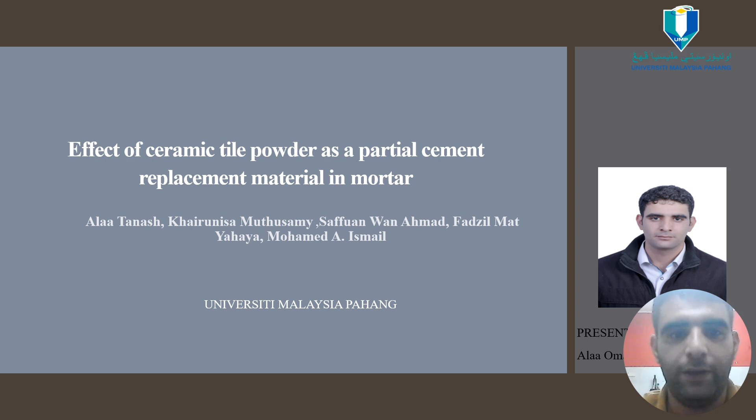I am here today to present my research work under the title Effect of Ceramic Tile Powder as a Partial Cement Replacement Material in the Mortar. We start with the presentation outline. In the beginning, we start with the introduction. After that, the problem statement, objectives of our study, result and discussion, and then conclusion of our study. At the end, the references.

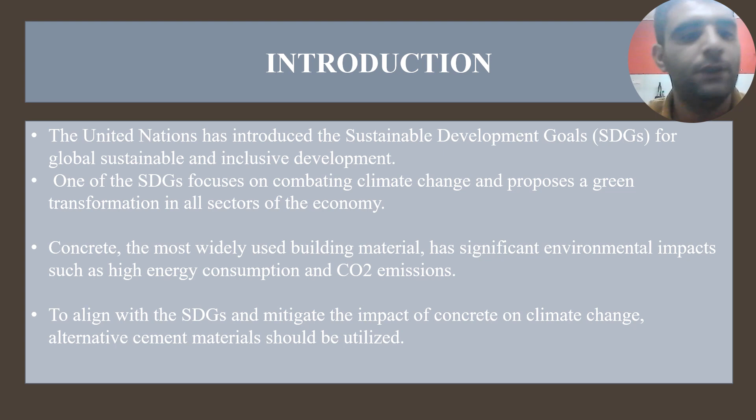Let's start with the introduction. The United Nations has introduced the Sustainable Development Goals for global sustainable and inclusive development. One of the Sustainable Development Goals focuses on combating climate change and proposes green transformation in all sectors of the economy. Concrete, the most widely used building material, has significant environmental impacts such as high energy consumption and carbon dioxide emission. In the end, to align with the Sustainable Development Goals and mitigate the impact of concrete on climate change, alternative cement material should be utilized.

On the other hand, ceramic products such as tile and sanitary ware are crucial components in construction. The global production of ceramic tile exceeded 12.6 billion square meters in 2019. Approximately 30% of ceramic production worldwide is disposed of in landfill annually. Ceramic waste, also from the construction sector, consists of about 45% of construction and demolition waste.

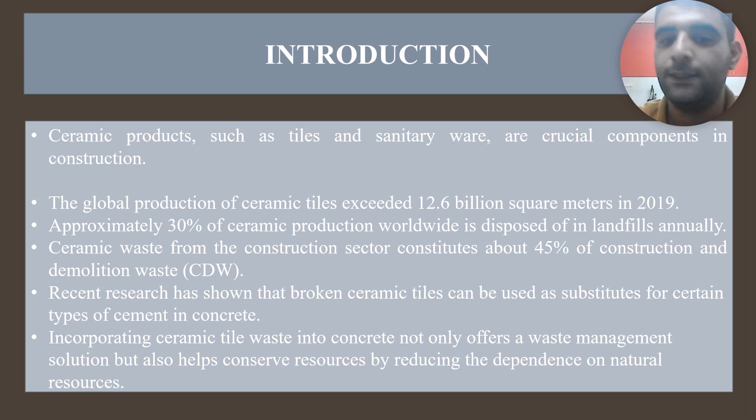Recent research has shown that broken ceramic tiles can be used as a substitute for certain types of cement in concrete. Incorporating ceramic tile waste into concrete not only offers a waste management solution, but also helps conserve resources by reducing the dependency on natural resources.

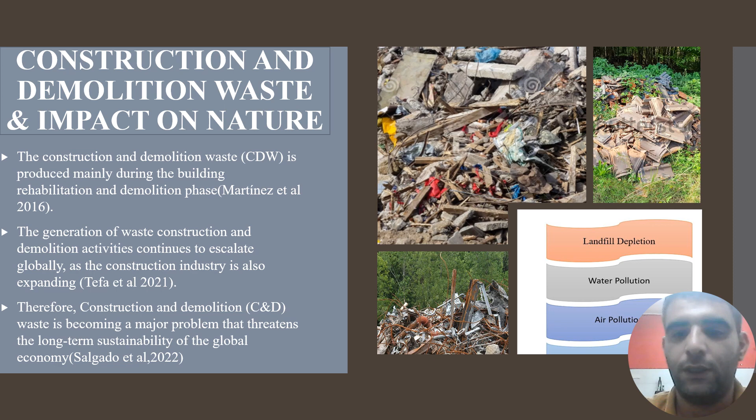Now the problem statement. First problem we have: construction and demolition waste and its impact to nature. The construction and demolition waste is produced mainly during the building rehabilitation and demolition phase. The generation of construction and demolition waste continues to escalate globally as the construction industry is also expanding. Therefore, construction and demolition waste is becoming a major problem threatening the long-term sustainability of the global economy. Here in the pictures, we see some of the environmental impacts of construction demolition waste. First of all, landfill, water pollution, and air pollution.

The second problem statement for our study: cement production and its impact to nature. The cement industry contributes mainly to carbon dioxide emission, and is considered the third emitter sector in the world. After that, energy consumption. The production of cement consumes a lot of energy; it's an energy-intensive process. This also pollutes the environment and, on the other hand, consumes non-renewable resources. Also, air pollution and land degradation.

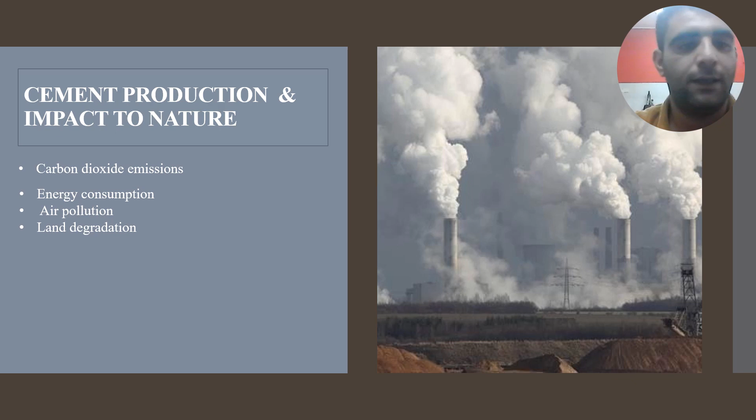Now, objectives of the study. First, determine the effects of ceramic tile powder as a partial cement replacement on the workability of mortar. The second objective, to determine the effects of ceramic tile powder as a partial cement replacement on the compressive strength of the mortar. At the end, the third objective, to determine the effect of ceramic tile powder as a cement replacement on water absorption of the mortar.

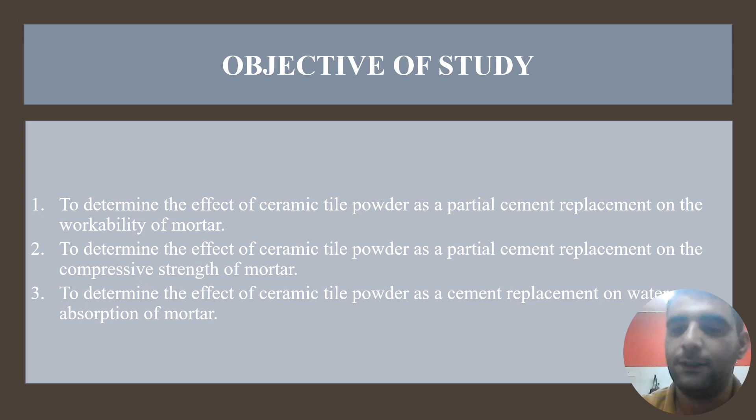Now, experimental program. Here we show the mixing ingredients. First of all, cement. We use ordinary Portland cement for our research. Second, the sand. River sand has been used as a fine aggregate. Ceramic tile powder, as a partial cement replacement with 10, 20, 30, 40 up to 50% replacement of cement. At the end, the water: clean tap water was used in this study.

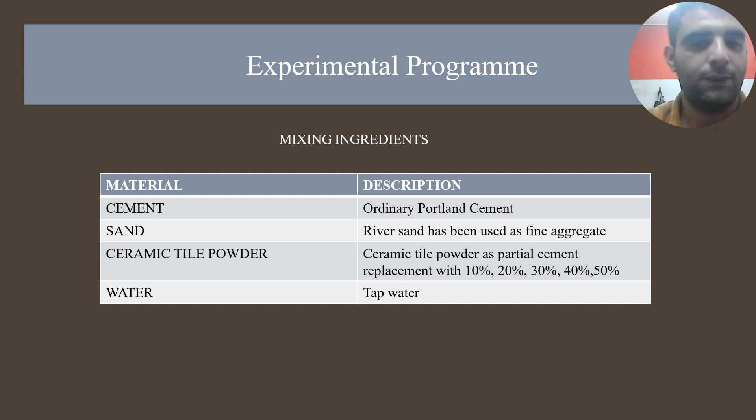Okay, testing and code practices. The first test, the flow table test. A flow table test was used to determine the mortar workability. The workability of mortar was determined using a flow table test in accordance with ASTM C1437-15.

The second test is the compressive strength test, to obtain the compressive strength and maximum loading of the mortar with various percentages of ceramic tile powder. The test was carried out in accordance with ASTM C109.

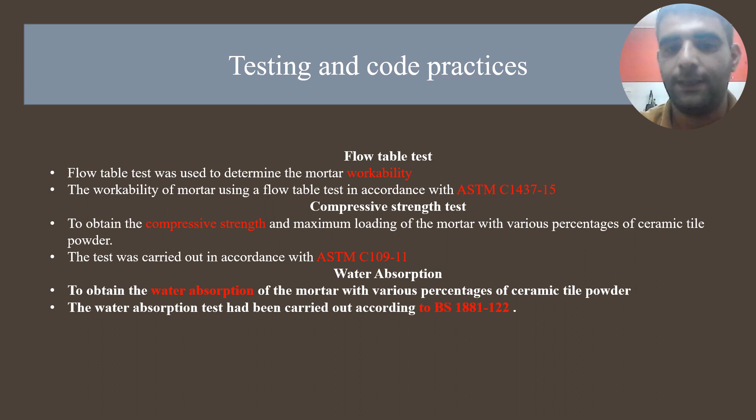The third and last test, water absorption, to obtain the water absorption of mortar with various percentages of ceramic tile powder. The water absorption test was carried out according to BS 1881-122. Now the results and discussion.

First of all, the workability. Here in the figure, we can see the flow behavior of mortar. Based on the figure, the flow of mortar decreases with increasing proportion of CTP as a partial cement replacement, reaching 150 millimeters at 50% replacement.

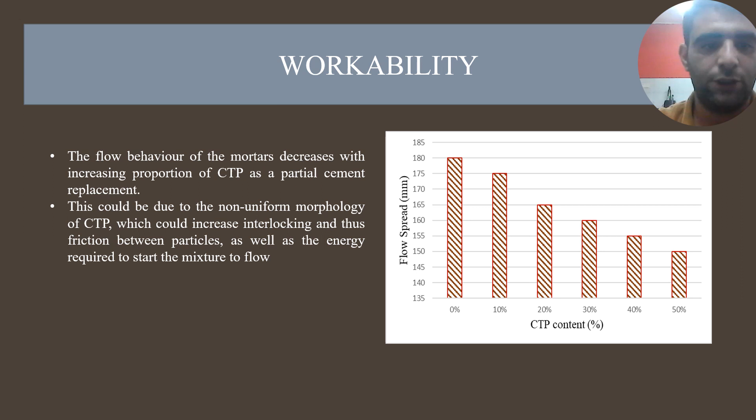This behavior could be due to the non-uniform morphology of CTP, which could increase interlocking and thus friction between particles, as well as the energy required for the mixture to flow.

The second test we have here is the compressive strength test. We can see in the figure the compressive strength with various percentages of ceramic tile powder content. The compressive strength decreases with an increasing proportion of ceramic tile powder. The 28-day compressive strength ranges from 29.37 megapascals to 52.5 megapascals.

The lowest compressive strength is at 50% ceramic tile powder. With replacement of more than 20%, the compressive strength decreased significantly. This is mainly due to the dilution effect of cement and also the low pozzolanic reactivity of ceramic tile powder, since the median particle size of the ceramic tile powder used in this study is higher than cement.

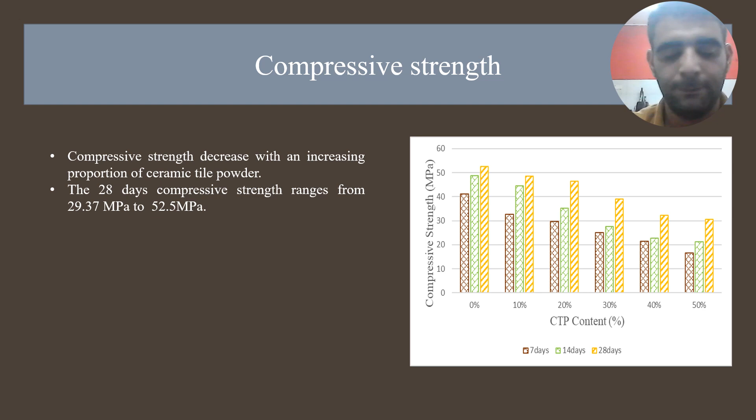The second, strength activity index. We can see from the figure the strength activity index of the mortar with various percentages of CTP content. The test results showed that the addition of CTP affects the compressive strength of mortar at an early age, proportional to the amount of CTP. This is mainly due to no pozzolanic effect of ceramic tile at early age.

At CTP content of up to 10%, the strength activity index of mortar with CTP is still more than 75%, according to the requirement of ASTM C618. However, at proportions up to 50%, the strength index dropped to 40%. The lower development of a primary calcium silicate hydrate structure in the matrix is held responsible for this performance, especially at replacement higher than 20%.

Mortars with 10% CTP had 92% strength at 28 days, while 20% ceramic tile powder had 88% strength, both exceeding the ASTM minimum of 75%.

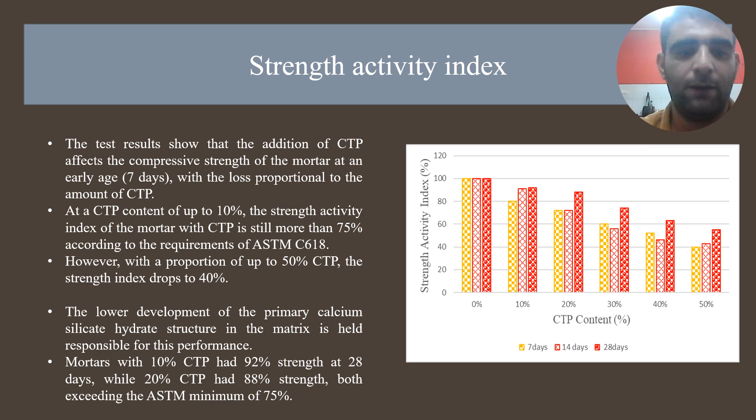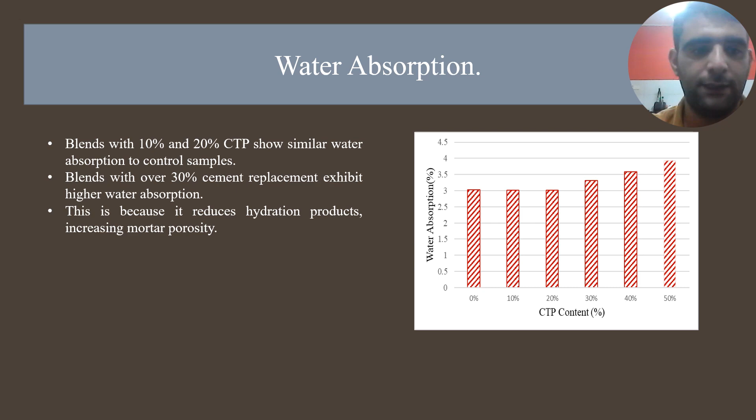In the end, the water absorption. We can see in the figure the effect of ceramic tile powder on the water absorption of the mortar. Based on the figure, blends with 10 and 20% CTP show similar water absorption to the control sample. Blends with over 30% cement replacement exhibit higher water absorption. This is because of reduced hydration products and increased mortar porosity.

At the end, conclusion. Using up to 20% CTP, ceramic tile powder, as a cement replacement results in mortar with comparable strength to control mortar. Excessive use of CTP should be avoided as it leads to a significant decline in strength.

Integrating ceramic tile powder as a partial cement replacement in construction material production has the potential to reduce the use of cement and decrease the amount of ceramic tile waste ending up in landfill. This approach would contribute to sustainability efforts and waste reduction in the construction industry.

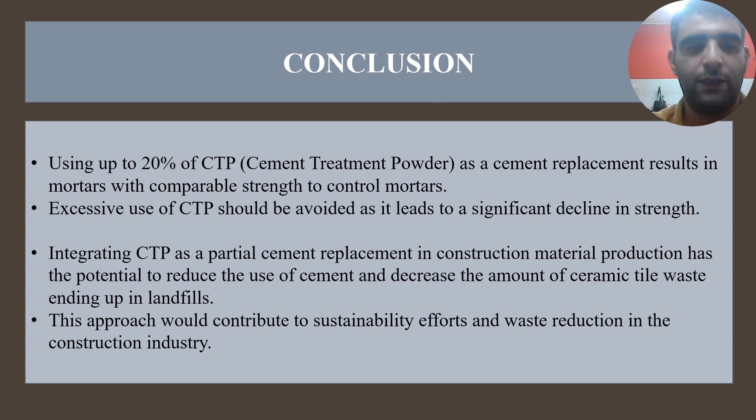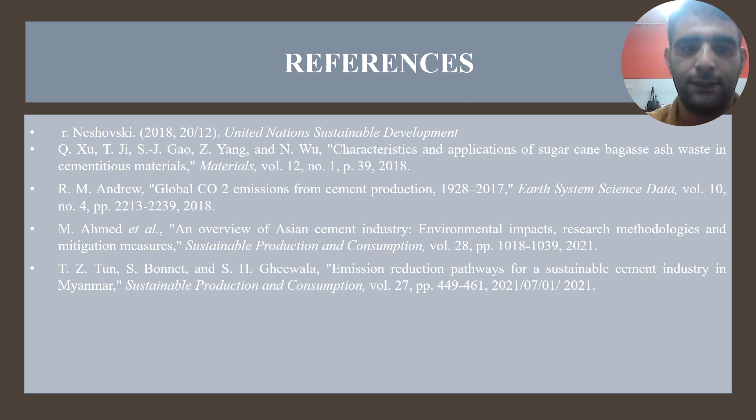Now the references used in this study. This slide shows the references used in this study and the presentation.